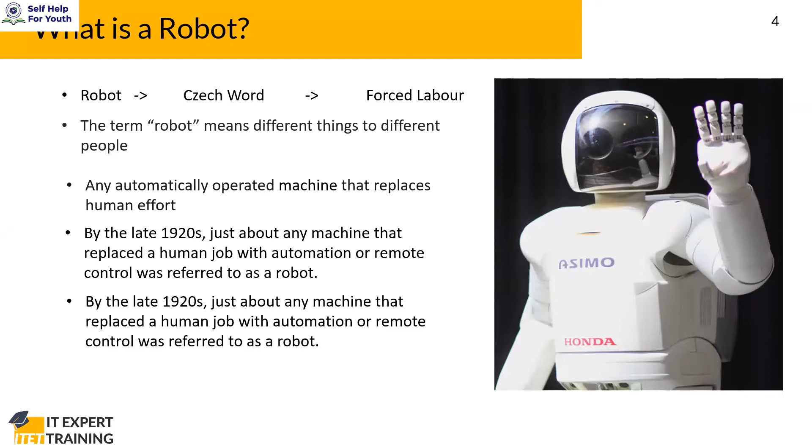The word robot came even in the 20th century, when a Czech writer used the word, which means forced labor. There were comics and novels depicting robots, but the actual creation of robots was not there until then.

So when robots actually started being built, we can say it started at the time the Renaissance was born. You must have known the term Renaissance already - that's around the 15th to 16th century, when we had this industrial revolution, when people actually moved into modern history. So that's what Renaissance means. Basically that was when time was born, people say, because of these mechanical clocks.

Mechanical clocks were prominent during that time. People were involved in creating mechanical clocks, and there are beautiful creations of those mechanical clocks - even now we can see them in European countries especially. Huge, magnificent clocks you can see now in buildings, showing how watchmen or watch mechanics put their effort into creating beautiful, even magnificent clocks.

So these clocks, they were automatic, right? They were automatic. These were the first things which gave rise to robots. Mechanical clocks were the ones which gave rise to the idea.

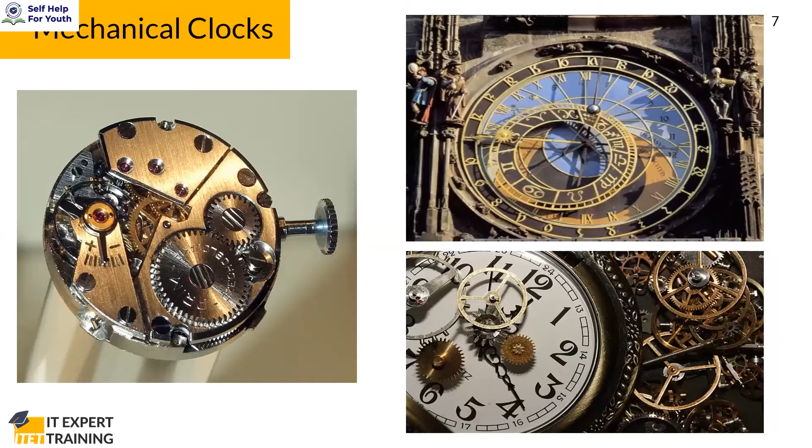These automatons were made during the Renaissance, in the 15th and 16th centuries. These watch mechanics used to show their talent by creating these automatons. That's how it all started basically - the idea of a robot, of having some automated machine, started that way.

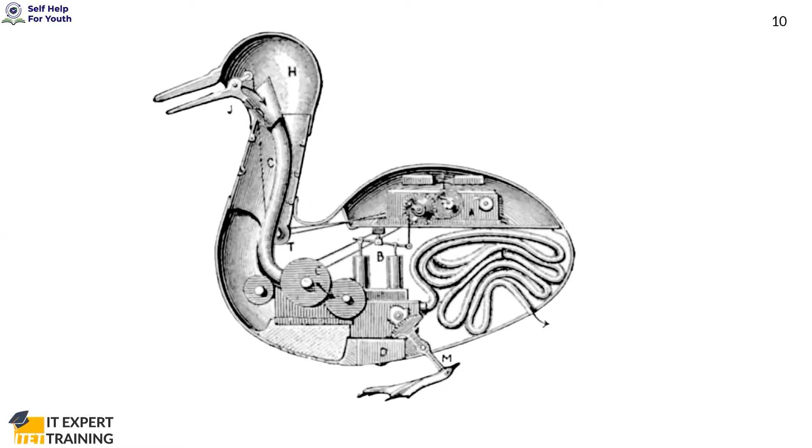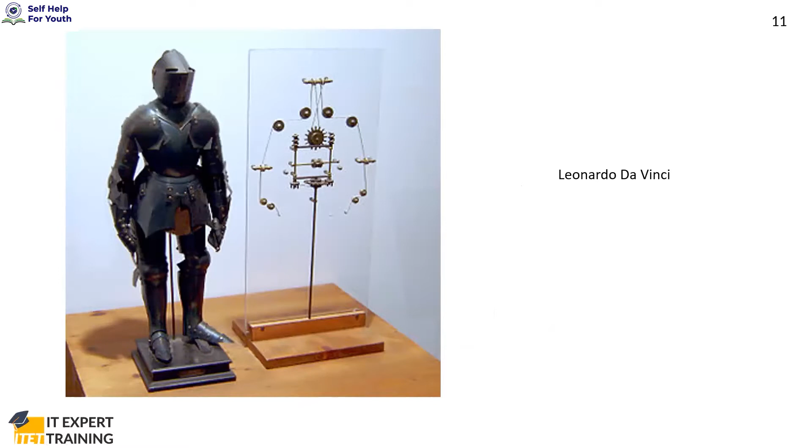Even now they use Leonardo da Vinci's notes, because he is not just a painter - he is even a scientist. He has created so many other things. People use even now his notes and create stuff.

Now coming to the first robot - this Eric British robot, created in 1928, can be called the first robot that can act automatically. It can actually stand, sit, and deliver speech. It has a speaker inside, and it has motors in its legs and arms. It can stand and sit, but not walk. So this is considered to be the first actual robot.

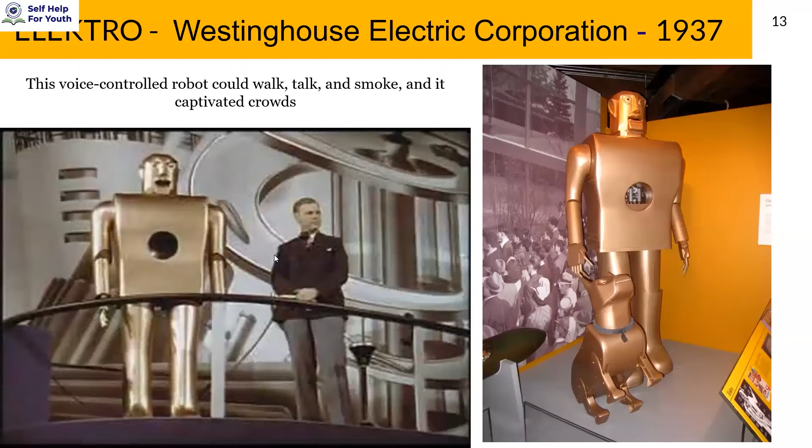Next, this one, Elektro, doing the same thing around another 10 years later. This got very popular. It was created by Westinghouse Electric Corporation in the US.

They were basically an electric based company, creating batteries and such. They wanted to show their power and increase their brand value. So they created the first electric robot, which could be powered like with a battery. They installed voice control in it.

Again, there's no programming here. Basically these voice notes used a mic with them. Now, the guy you see on the left side, there's a very good video about this. You can search the robot's name and find it.

After the session, check it out. This guy used to speak to the robot using a mic, and the robot would respond back with predefined responses already stored inside, saying it back again. So basically it could slightly walk and talk. It was even said this robot could walk up to 60 kilometers in a single stretch, though very slowly.

So this is another primitive robot which created a lot of attention among people. People never believed this back then, that there was something automatic happening here. What they thought at the time was that some man was inside the robot talking through it, but actually this was real.

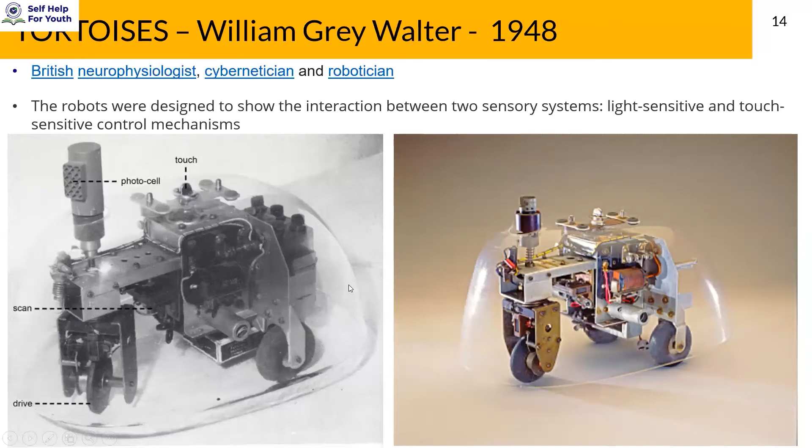What this robot could basically do was move its arm front and back. People used to use the robot for welding purposes, and even for placing and picking up objects. So that was how industrial robotics started.

There was no industrial robotics before this. People had been creating robots for fun purposes, for fancy stuff, for recreating human kind of things. But the actual use of a robot was put in place when this robot was designed by Kawasaki, and even now Kawasaki can stand along with other companies.

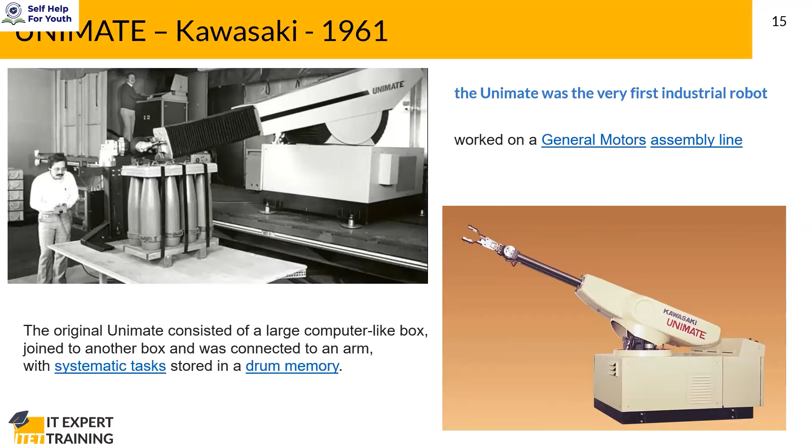Now the next thing is Shakey the robot. This is very important again. Before, we saw how tortoises are used for sensors. Now this robot basically paved the way for other reasoning abilities in the robot. This robot actually had, we can say, artificial intelligence. It was able to identify blocks, 3D objects.

This was the first time a robot was able to sense its environment. Keep that in mind, robot sensing its environment happened only now. Before this, a robot was just doing some steps. It was not sensing basically, it was not looking around. But this robot was able to look around and sense its environment and understand its environment.

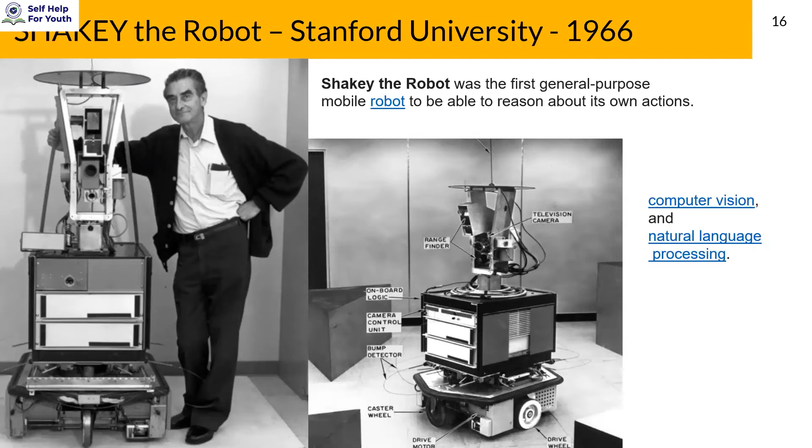So this was when it started, and this paves the way for even now. The computer vision techniques we have now, NLP, everything is based on this. And there is also a developed version of Shakey now available, you may go and check it out.

And the next robot, Wabot from Waseda University. This is again a Japan-based institution, Waseda University. Before this, you saw human-like robots, but none of the robots before this actually replicated human action. There were human-like robots, but they were just sitting and standing, there's no walking involved and all that.

But this robot was the first one to replicate human action. It was trying to walk basically, it's a biped. So this was when robots' attention on replicating human action started. Before this, there was no interest in that. This Japan University, Waseda, started to replicate human actions.

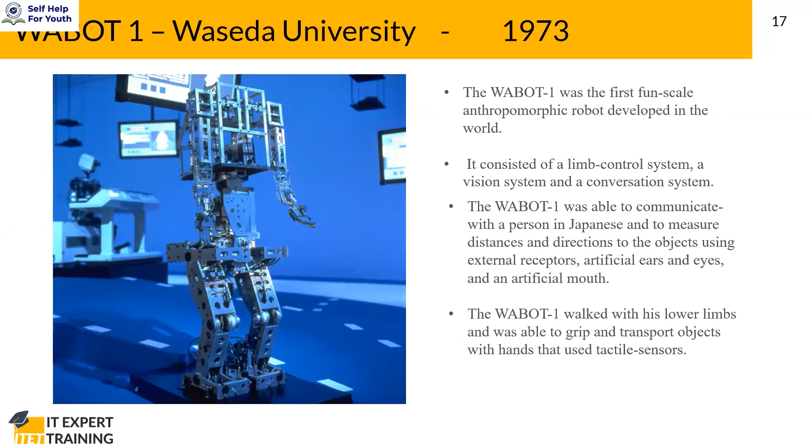So at this time, the intentions of creating a robot drove this way: why shouldn't we create a robot for multiple applications? Why don't we create a robot only for a specific application?

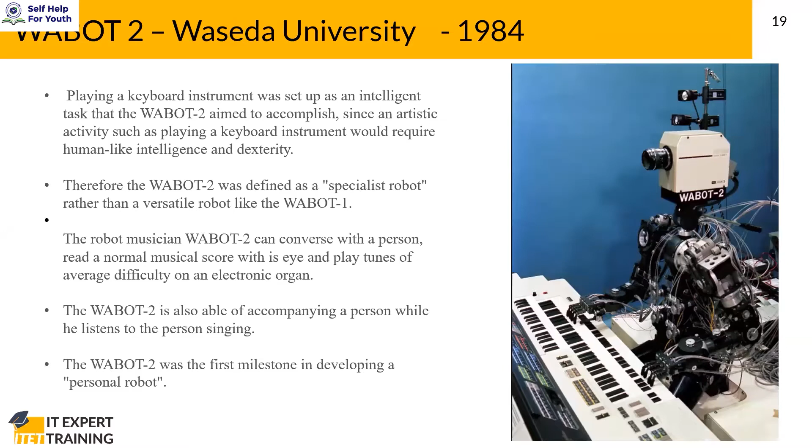Even now we can see every robot looking the same way. They may have multiple axes and more degrees of freedom, and they can move more freely than this, but every robot maintains the same color. This paved the way for all the automation-related robots we have now. All automotive industries, all car companies - you can go and see these kinds of robots there. So this is the first one, in 1974.

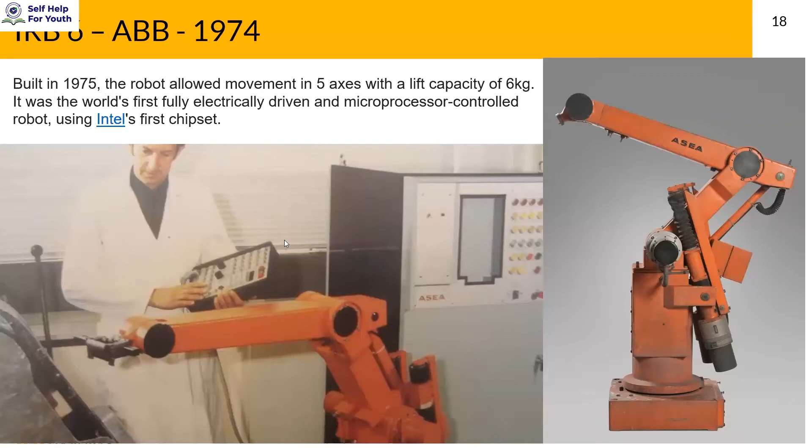And the next thing, we saw this - we saw about WABOT 1, right, where the robot was trying to actually walk. I told you that was the first biped robot. Now, the problem with that was it was able to move front and back, but not in a stable way, not exactly like humans.

Humans have a pelvis before the legs. So basically we take one leg up, we keep the other leg down, we move the hip and then take the other leg. Walking involves more actions. So these people at the same university were actually trying to study human anatomy, and they brought every anatomy point into the robot.

You must be knowing Asimo and all that, right? Asimo is a very famous robot. When you just Google for a robot, you will get Asimo's pictures first. Asimo was actually inspired from this, because Asimo's main target in the beginning was to actually walk like a human. They wanted to create a robot which walks like humans. So this was inspiring Asimo, and 20 years after this they created it, almost 15 years back.

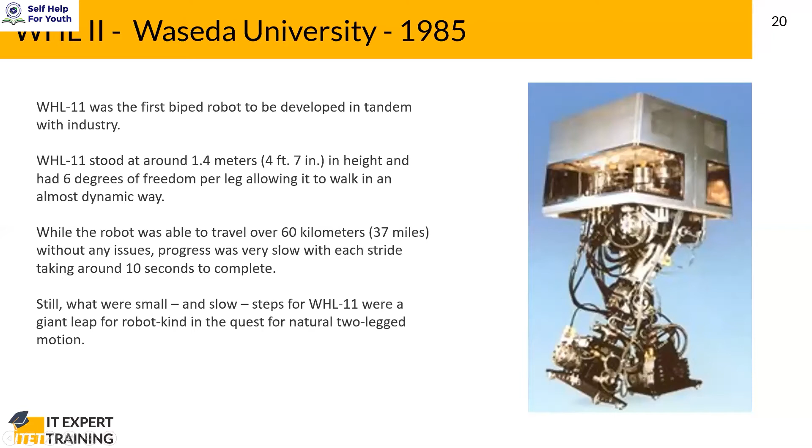Now after this - next is Asimo. It's there already. Asimo came out in 2000, but the work actually started 20 years back. Even in the 1980s, Honda was working on robotics. But until 2000, they were silent. They released a few robots, but still they were not prominent. They didn't reach people much.

But in 2000, they released Asimo, and you know how it went viral. Asimo is the first - to be frank, when someone says robot, people's mind goes to Asimo first. Even now, the reason I've given here 2000 to present is Asimo is being developed even now - the brand is there. Usually when people create a robot, they try to sell it, right? But Asimo is a product, a brand created only for research. I don't think you can sell Asimo anywhere. You can see Asimo only on research related projects. So Asimo is a robot dedicated to projects, research and all that.

And the next thing - Boston Dynamics. Now this is where things get really interesting - interesting in the sense really quirky. So what happens here is after 2000, Google thought of getting into robotics. Google was already getting prominent at that time. So Google wanted to get into robotics, but it was not starting a new company, not starting anything on its own name. There was already a company called Boston Dynamics, and Google acquired it. So after acquiring, they made all these things.

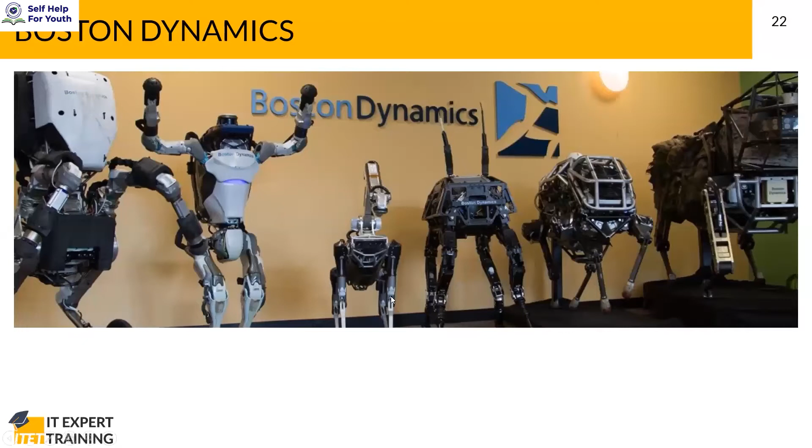And these are some of the robots. I'll just show a few. Okay, see, these are some famous robots: Spot Mini, Spot, Atlas, and Handle. All these are different things.

And Atlas here is basically a robot created to take punches from humans. They created Atlas and were checking how the robot is able to manage from falling down. So they tested all the robots using Atlas - they used to punch it, push it down, put bananas underneath and make it fall down. They were trying all those things to make the robot stable with Atlas, and after they figured out how to do it, they applied it to other robots too.

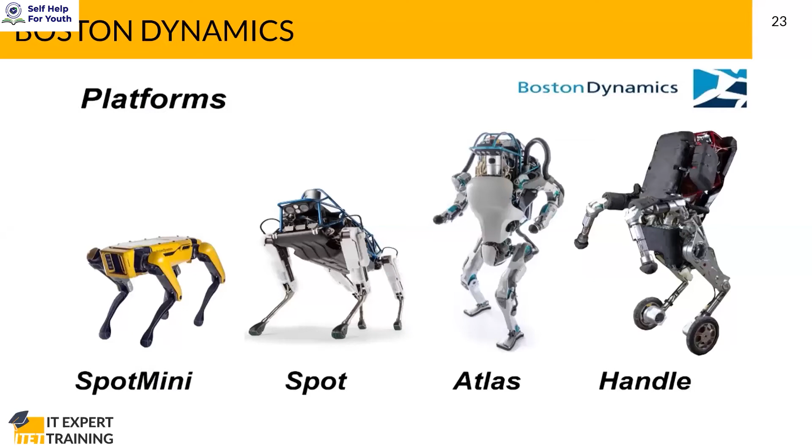See here, it's doing karate. It's jumping, it's running, it's avoiding a log here. It even kicked someone - I don't know where it's kicking.

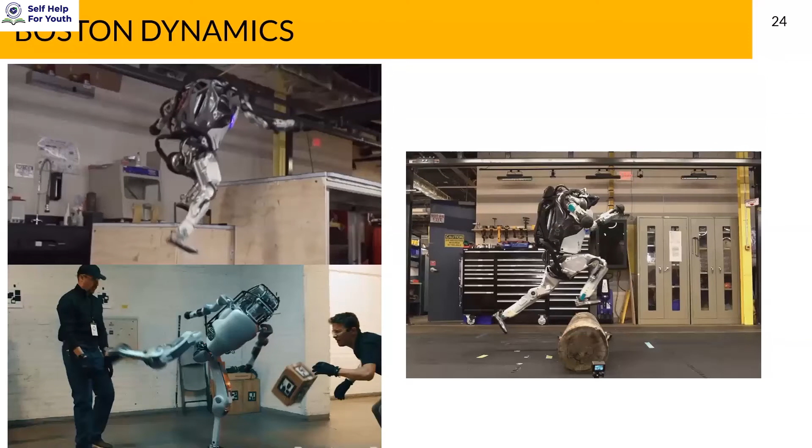Spot Mini came in 2018, but the work is still on. There are a few other robots still being created - they're getting attention now. After 2018, other robots are being created. You can just Google Boston Dynamics and check their latest YouTube videos.

The next thing I want to show you is iCub. Before this, robots were actually told to do something - they were programmed explicitly. Machine learning came into prominence about 10 years back, right? We hear machine learning more in most places now.

So when it started around 2010, what these iCub people thought was, why don't we put the learning capabilities of humans into a robot? Not just tell the robot what to do - it's basically like teaching a robot to learn like a human. So they programmed it in a way so it can learn like a baby.

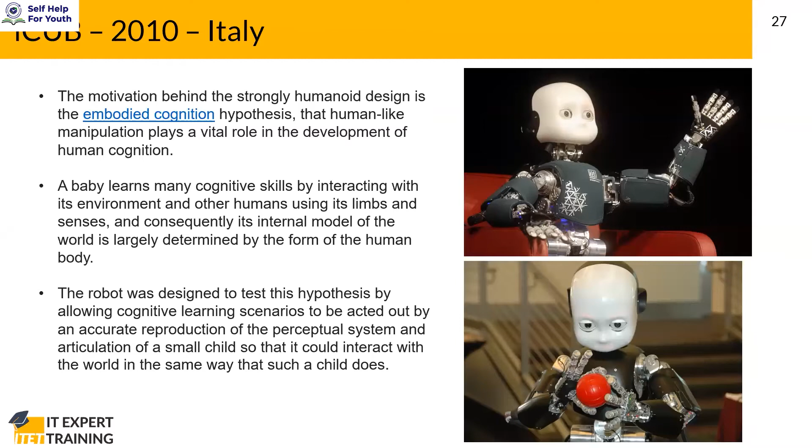Usually, when you speak about robots, there was fear among US people. The reason why, even though there was good improvement in robotic inventions in US in the 1980s and 2000s, the inventions were not more. Japan was actually developing more, but inventions in the US and other countries stopped because people started to fear robots. Those times the movies were like Terminator, and people started to look at robots like enemies. So inventions actually stopped at that time.

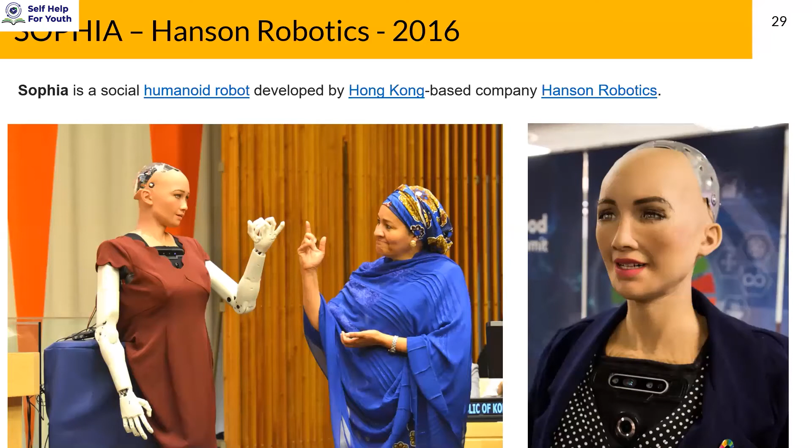So he created this robot called Erica, and this is the same as Sophia. Even recently, this robot has got a role in a Hollywood movie. I don't know which movie, or if it has already come out, but it got a role in a movie now. Let's see whether we see this in a movie or not.

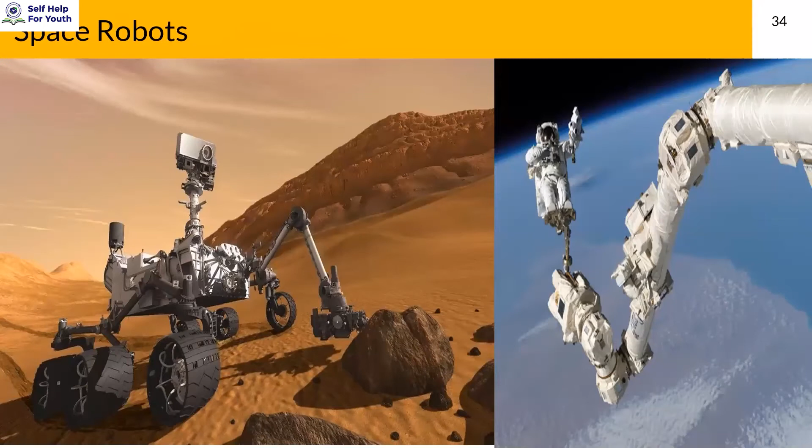So this is the final one, space robots. Just like Valkyrie, these are robots being built by NASA and other space agencies. They help in exploring Mars and doing other stuff in space. Basically, they do what humans can't do, because humans can't go to Mars and do stuff. So these robots can do that. They go to harsh environments, they explore land and do all that stuff.

Now, summing up everything. You must have seen almost 15 plus robots now. You may not have everything in mind, so just to put everything into picture, see what happened from the 1930s to now. Basically in the 1930s and 40s, robots were fancy creations, and people wanted to showcase capabilities, so they made robots. There was no intention of using them, just to showcase the capability, fancy things and all that.

In the 1960s and up to the 80s, the initial robots were created, like the Kawasaki thing, ABB, the initial robots. It came into prominence, but then even Japan was on top, USA was still on idle mode. From the 1980s to 2000, they wanted to work more on human-like activities like walking, biped stuff and all that. Industrial application was getting more important, and more industrial robots were being developed from the 1990s onward.

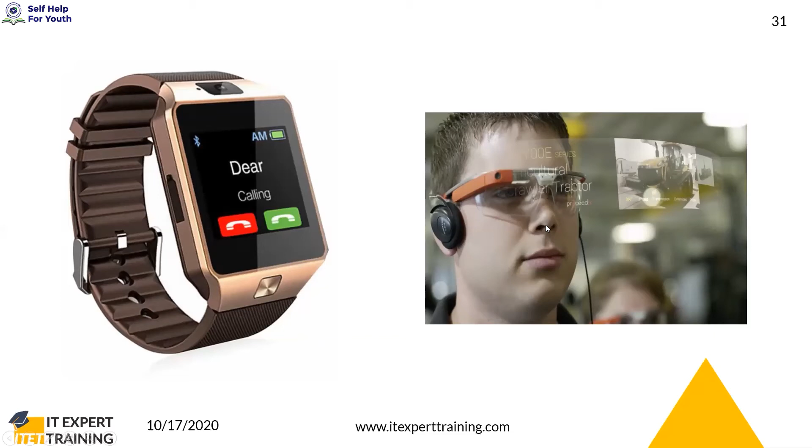Similarly, what you see on the right side is Google Glass. Your glasses just show you things clearly, but now they even show you videos. All this because of IoT.

So basically what happens here is, after IoT, one thing acts like many things. For example, your mirror, it doesn't act only as a mirror, it acts like a mirror as well as a weather reporter, as well as a schedule keeper. So you see the transition now.

What IoT has done in just the span of 10 years, IoT has basically changed everything we see around us. You can make anything as intelligent around you. Whatever you name as things, you can make them intelligent, and they can be made to do just like what you must have seen in this Transformers movie. There is a cube actually which brings everything into life. The cube falls from somewhere, and basically every machine comes to life right after the cube touches it. Similar to that, IoT is actually bringing everything we see around us into life. It's giving intelligence to them, and everything around us is more like a fantasy now.

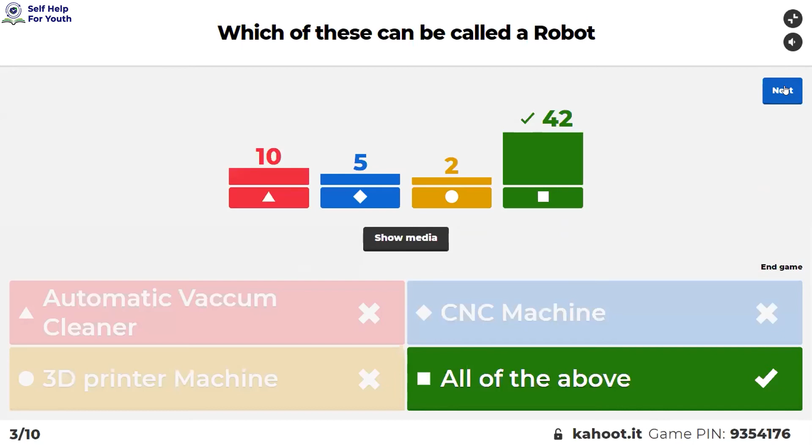People have answered the right. I'm giving you 15 seconds only for the next questions. Bint Zafar is maintaining her position. Yasmin, Afif, Nazia, Fatima, and Fahad. T has the highest answer streak of 3. But T, your name is wrong. You have to use the name you've given in the registration.

Just 15 seconds. Remember, IoT devices are artificially intelligent. True or false?

Bint Zafar is still maintaining her position. Yasmin, Nazia, Fatima, Fahad, and Safiya. 11 players have reached answer streak 3. Okay, well done. Question number 5.

True or false? IoT devices only use Wi-Fi as the data transfer medium. It's a very easy question. We have 5, 4, 3, 2, 1.

50-50. A lot of you have got it wrong actually, very few. Bint Zafar has lost its position. Nazia Fatima has climbed up. Fahad, Ilyas, Safiya, and Sanofer have come up again.

Question number 6. Internet of Things deals with automation. True or false? 10, 9, 8, 7, 6, 5, 4, 3, 2. Okay, Nazia Fatima is maintaining her position, and Sanofa Pavin. Khalid is the highest climber with 13 places, mashallah.